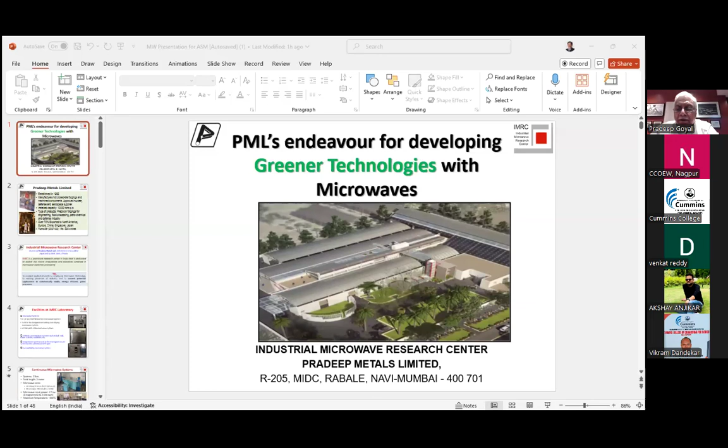Sir, just share your screen. Yeah, I'm trying to do that. What happens? There is a button, share. Is that... yes, okay. Perfect, perfect, okay. Just do, yes sir. Okay, is that good? Yes sir, perfect. All right.

Wonderful, all right. Ladies and gentlemen, thank you so much for inviting me to give this little talk on microwave research that we are doing at our company. Basically, our company has nothing to do with microwaves. We are in the business of making forgings and exporting them. But this came as a sort of offshoot of what I wanted to do based on some of the work that I had done in the past in research.

So I'll just go through some of the work that we have done in this company since 2006, that's when we started this microwave activity. This research has been going on for so many years. Several processes have been developed. It's a very challenging environment to work with microwaves. As you all probably understand, each one of you knows what a microwave is for sure. I think there is no home which does not have a microwave cooking arrangement in their kitchen. But we always fear that we cannot put metal into the microwave oven.

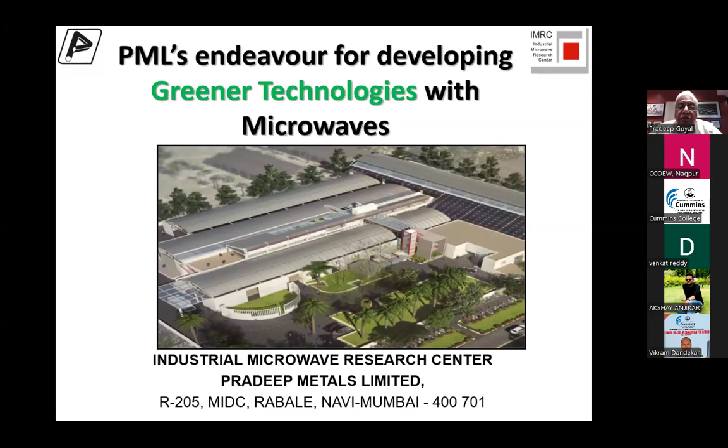So with that brief background on microwave heating, I will proceed to what we have. This is just a picture of our factory in Navi Mumbai, which is mainly focused on manufacturing steel, alloy steel, stainless steel, and other forgings, which we typically export.

We started this company, as the introducer already mentioned, in 1982, when I returned from the US, and we have grown since then. Most of our products are exported to North America, Europe, Japan, China, and other countries.

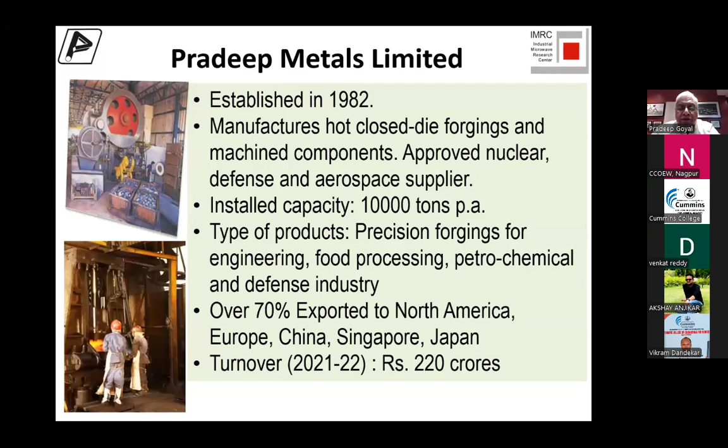This is a slightly dated figure: our turnover in 22-23-24 was 260 crores, showing little growth—of course, this covers the COVID period, which affected that number.

So we created what is called the Industrial Microwave Research Center in the year 2005. This is a DSIR, Government of India approved lab, and we conduct research here to exploit innovations in microwave materials processing.

Our goal is to look at processes that can lend themselves to using microwaves rather than regular conventional furnaces for heating or other processes, and to convert these potential applications into commercially viable, energy efficient solutions. As you'll realize, if you're heating something in a regular furnace that's gas heated or similar, you are actually using fuel.

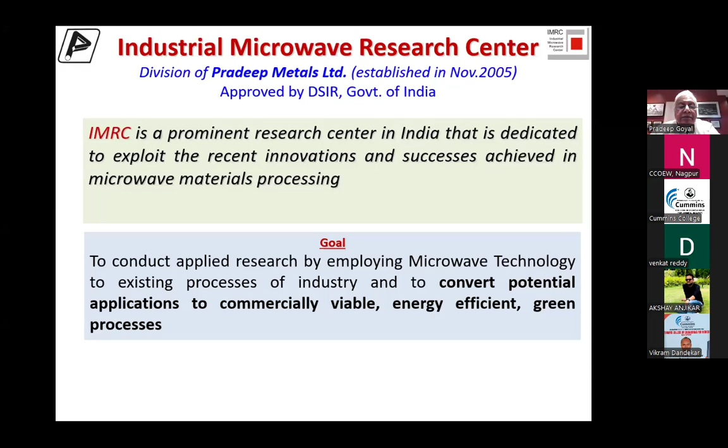In this case, it's called green because we are using electricity, and soon a lot of electricity is going to be green because of solar, wind, and other technologies. So microwave processing is termed a green process, basically. We have a variety of different sizes of furnaces available in our factory and in the research lab.

The first one that you see here is the one that we brought. It's a 5 kilowatt low temperature baking furnace. We have a pilot scale microwave system. We have mineral comminution systems, ball mills, mixers, magnetizers, and susceptibility measuring system.

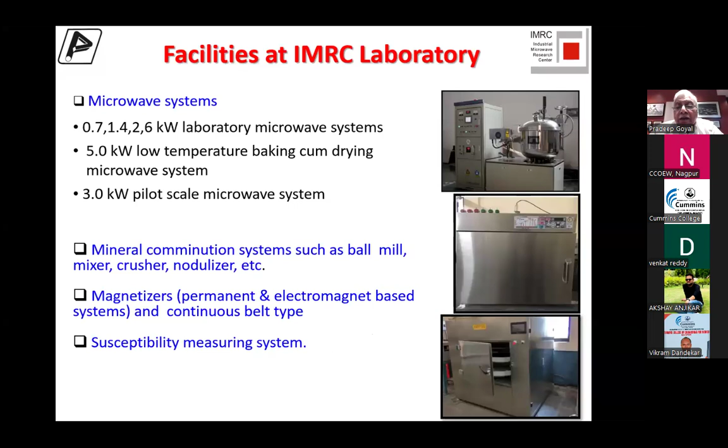Now, susceptibility is what I talked about, the way any material behaves under the microwave environment, how susceptible it is to absorbing microwaves. That is the intention behind this.

Then we have continuous microwave furnaces. You saw some pictures of stationary batch furnaces. Now you see some continuous furnaces. The one at the bottom is the latest one that we have installed, and I will come to the details of that a little later.

You can put a lot of different microwave powers in it. Just to put into perspective, the kitchen microwave oven is 0.7 kilowatt, generally in that kind of range. Most of these that we have are 3 kilowatt and above, so it's an order of magnitude higher in terms of the microwave energy that we can provide.

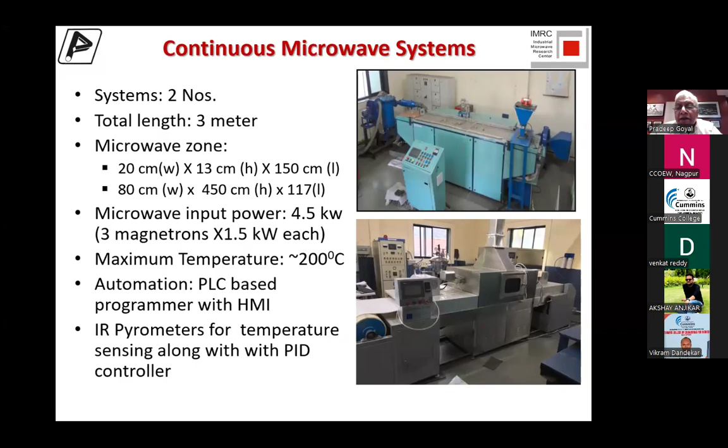All of these are PLC based. We have pyrometers to measure temperatures of the product which is inside the furnace.

So over the years, we have applied for several patents and several have been granted to us. We worked in a variety of fields: petroleum, iron ore, processing of grinding wheels, making friction pads for automotive and even aircraft, processing of ores of different kinds. And of course, the biggest one was iron making technology, how to make iron using a microwave composite heating furnace. This technology we developed along with Chubu University in Japan.

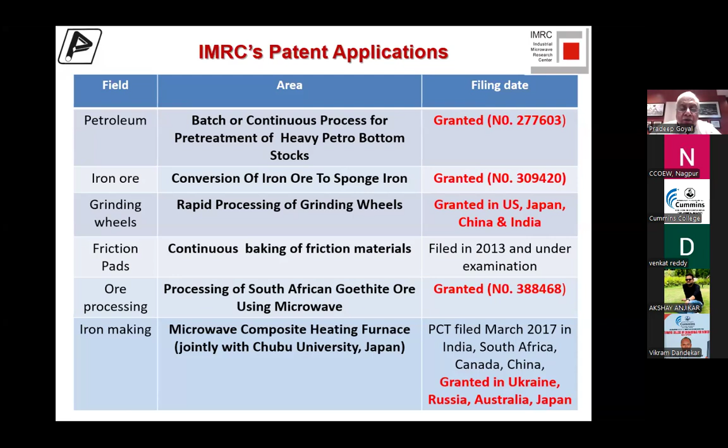Initial trials were conducted with a lot of different high temperature works. We did sintering of ceramic plates for solid oxide fuel cell electrode materials, metallic and ceramic composites, sintering of powder metal base components made of stainless steel, and transparent ceramics. All of these are things we experimented with extensively.

But we realized sooner or later that many of these may not convert into commercially viable processes. It was a great learning experience for us, but we did try processing a lot of different kinds of products in these furnaces.

Sintering of porous ceramic filters is an extremely viable process. A lot of Japanese and Chinese mills are using this for casting, so it's a standard process now.

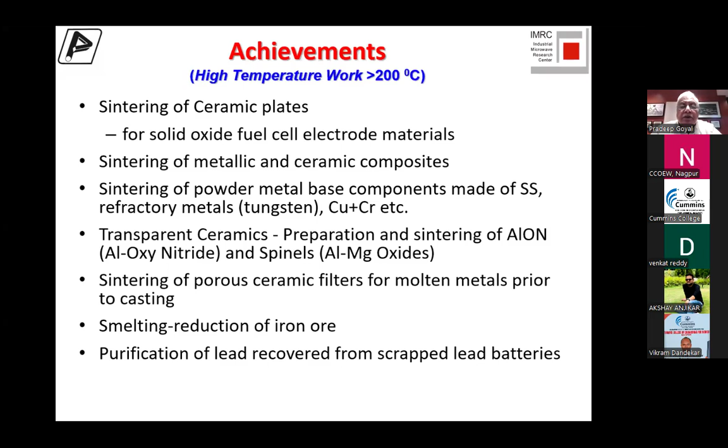Smelting reduction of iron ore is what I'm going to show you a little more. Purification of lead recovered from scrap lead batteries we did for a company that has developed a low temperature lead recovery process by electrolysis. So some of these works we did for many different companies.

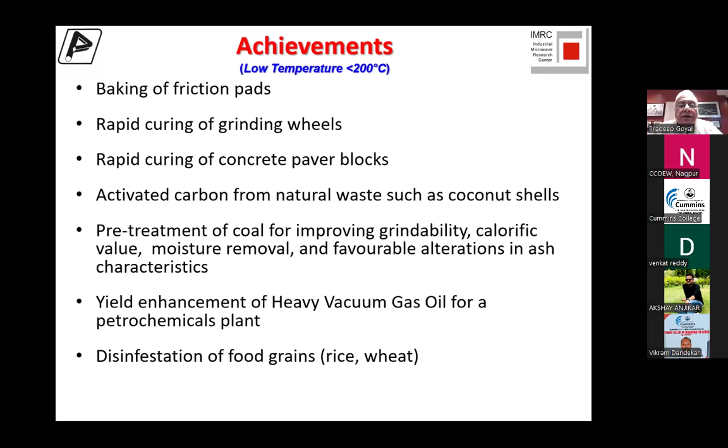And it's a very interesting thing. I will come to that also as we go later. So it's just a summary of what we had done.

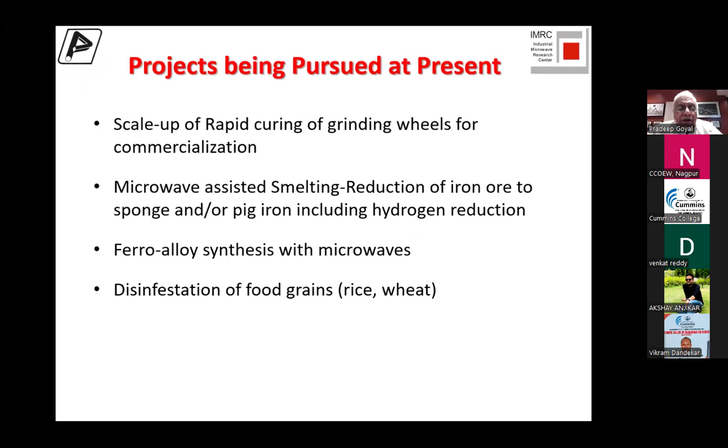Presently, the processes we are focusing on are scaling up the rapid curing of grinding wheels, microwave assisted smelting reduction of iron ore in hydrogen condition now. We tried pure electric activity, and now we are trying to look into the use of hydrogen. That's the future where the world is headed. Also ferroalloy synthesis with microwaves, and finally disinfestation of food grains, rice and wheat, which is becoming quite critical now.

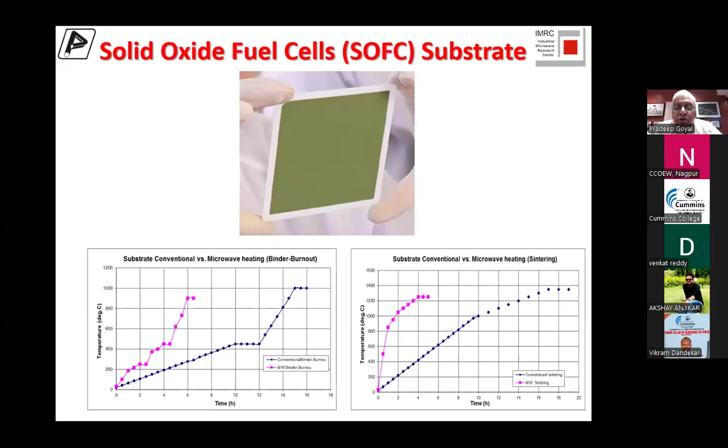One challenging assignment came to us from DMRL in Hyderabad, who had tungsten powder and wanted to actually melt it in some places. They also gave us the powder to look at how we can make the microstructure better.

Here you can clearly see the SEM images at 1000x of the as-received tungsten compared to the sintered-in-microwave tungsten at 1800 degrees Celsius with 1 hour soaking. So not only did we go up to 1400 in steel, but for tungsten we went up to 1800 degrees Celsius in a microwave environment. There's a lot of porosity compared to the milled tungsten, which showed a very good microstructure at 1000x.

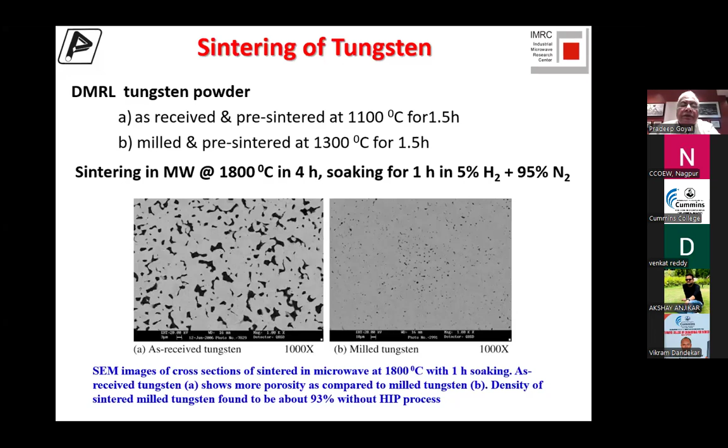I'm not going to spend more time on this. This is just to give you an idea of the variety of things that were done for our learning process.

This was really a big project we took up to see that we can rapidly cure grinding wheels. Grinding wheels are used all over in every industry you can think of, for cutting steel and all kinds of things.

Now here you see this graph. The conventional process is the blue line. The grinding wheel is so thin, like 2 or 3 millimeters, and if you try to heat it very fast, it will crack. The green grinding wheel will crack.

That's why if you see the stepwise process going from 80 degrees to 120 to 150 to 180, slowly heating the grinding wheel and keeping it at temperature, after about 1600 minutes you have baked the grinding wheel. But when we did it in a microwave environment, look at the black graph: we went up rapidly from room temperature to about 230 degrees and cooled it, and nothing happened. It didn't crack. Nothing happened to the product.

Now if you look at the energy as an area under the curve, look at the amount of energy used here compared to the energy used under the blue graph—it's huge. So when someone once said you can save 95% energy by processing materials in a microwave environment, I couldn't believe it. But after doing this research, I could clearly see that a huge amount of energy is being wasted presently, and that can be saved significantly.

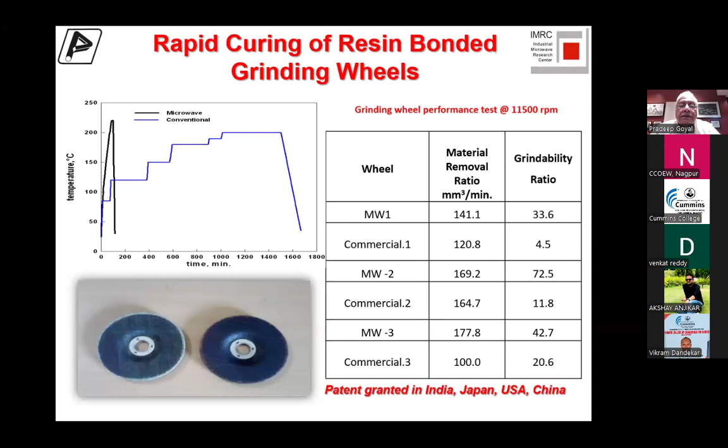Here you can see some performance parameters for commercial wheels versus the microwave-processed wheels. You have much higher properties, much higher grindability ratios. We could actually use this grinding wheel to cut twice the amount of steel compared to commercially available grinding wheels. This was a huge success, and we are now working towards full-scale commercialization of this process.

So it's very simple, affordable, and economical. The grinding wheel is rapidly and selectively heated by microwaves, leading to a huge reduction in processing time. The process is highly energy efficient, as I said, and it provides better properties of the product, such as metal removal rate and grindability ratio.

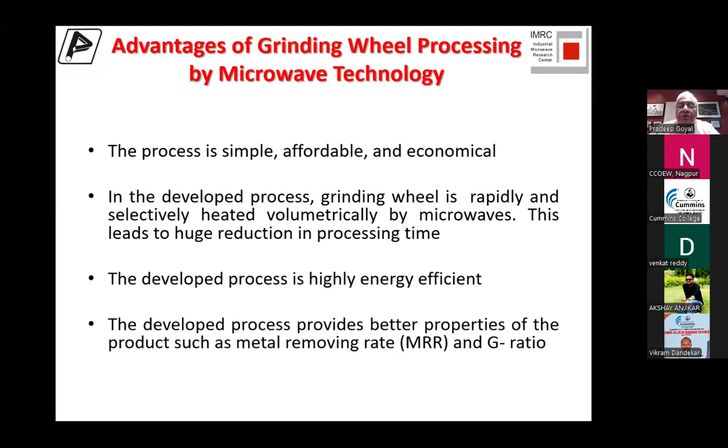Then we looked at, for an oil processing company, a process for pre-treatment of heavy petroleum bottom stocks. When we make petroleum in the refineries, you get what is called HVGO, which is then processed in hydrocracking for fractional distillation. We developed a process where we passed the oil through a magnetic condition and processed it in microwave. Because of that treatment and exposure, we were able to draw out more kerosene and more fuel compared to what they were actually achieving. At the same time, we were able to reduce sulfur, which is very important for kerosene and diesel—the sulfur in diesel went down from almost 18 to 9, half.

Which was very exciting for these companies. But of course, as oil companies are giants, and we are kind of a pygmy, they probably took it upon themselves to carry on further research. They probably used us to get this data and get this idea, but then scaling up an oil company's process is a huge challenge for a small company like us.

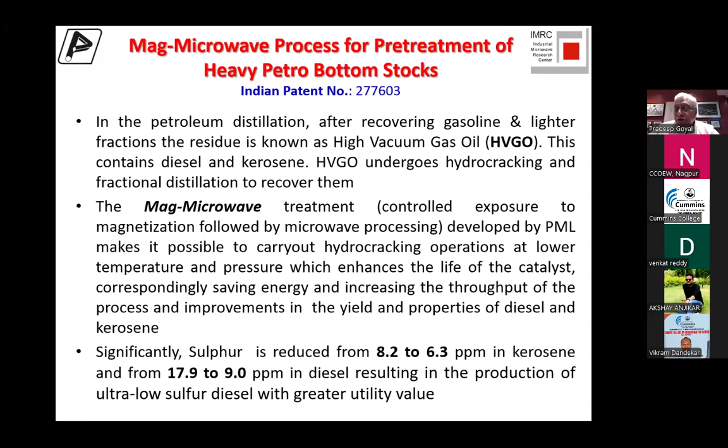So we are happy that they were able to look into this process a little more. We found that you could get at least 1 or 2% more fuel, which is huge in a refinery. To get 1 or 2% excess fuel out of the petroleum base is extremely high, very interesting for them.

Then we took another process, which is the pre-treatment of coal. Coal comes in a variety of different types. Some are very hard coals, difficult to process, with trapped water in it. That eats away the energy, since the water has to be heated.

And water is what we want in a microwave process, right? So water is what really works. When we processed the coal in the microwave, we were able to take away all the water from the coal. But an interesting thing happened: because of the disproportionate heating of coal and water, the whole coal cracked, and you can see how the cracks appeared. This hard coal, which was very difficult to grind, became very pliable for grinding also.

So we achieved two successes here: one, removal of water, and two, making it more easily grindable. The third benefit was that the ash fusion temperature increased from 1160 to 1310, which is extremely crucial for a power plant.

When you heat coal in a power plant, the ash that comes out chokes up your tubes. But if the ash fusion temperature increases, the ash won't stay in the tubes, it will pass through, so the tubes last longer. That was another big advantage that came, which we were not really expecting. It was an unusual thing that we realized.

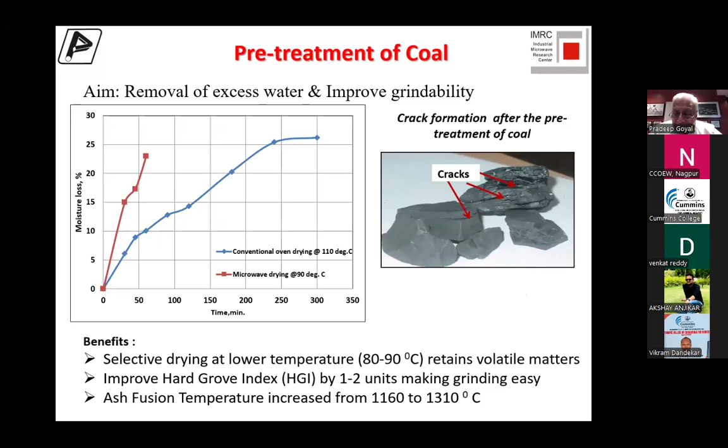Many times what we find is we process these things, but we don't understand the underlying technology, what is happening there. So in many ways we call microwave processing like magic. Many of these things are still not scientific processes - they've been developed, but the science behind them still has a long way to go to understand some of these things.

Now let me come to the main portion I was asked to speak on: microwave assisted iron making. We started with very small green pellets to melt in the microwave oven. We took these green pellets of high-grade iron ore mixed with coal. Mind you, all steel mills use coke for melting and reducing iron ore.

But we never used coke, we always used coal, because coke is very difficult and very expensive. We used some binder, and were able to melt the pellet comfortably to get iron and slag. This is the configuration and analysis of the iron we produced in a small scale furnace initially, with low sulfur, low phosphorus, decent manganese, and 97.78% iron, which is quite good, and we recovered the carbon.

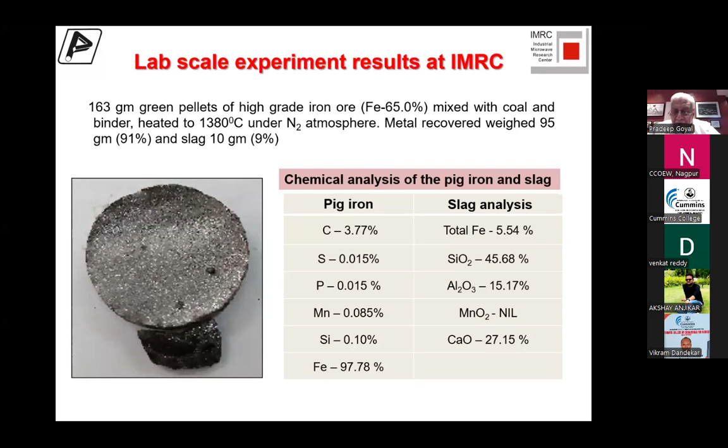So we were able to make very good quality pig iron. Then we took a higher size - a 700-gram green pellet. Now we took the low-grade Goa iron ore. Here the iron content in the ore is only 46%, so a lot of it is sand and other materials. We did the same process.

Here we were able to melt the iron at 1300 degrees Celsius, which is very low compared to how iron is normally made. If you see the bottom with the pig iron, there's a very small amount of pig iron there, but a very large amount of slag. This slag is because there was a very low quantity of iron available in the raw material we processed.

And it separated very nicely - you can clearly break off the slag and remove the metal out of it, right? So here again we recovered all the carbon.

Phosphorus was a little higher because the content in the Goa iron ore was significantly higher, and of course we were able to recover a lot. Here you see a lot of silica, SiO2 is about 37%. This was very interesting—this was again a find which was unknown.

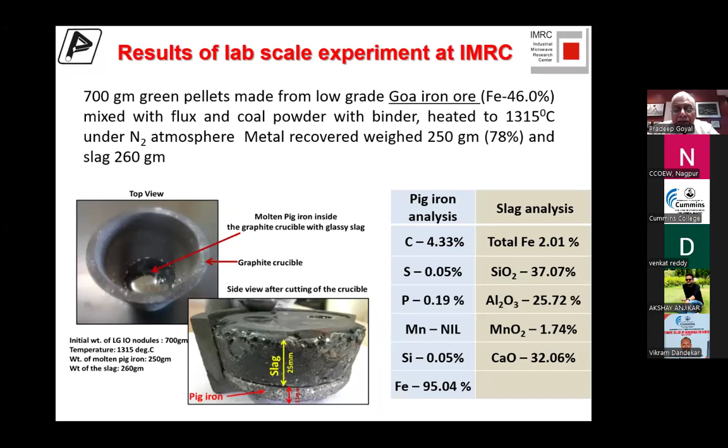This was a green glass, so we didn't know what this looked like. So we sent it to a government lab called CGCRI, Central Glass and Ceramic Research Institute, and they were very surprised. They said, 'How did you make this?' I said, 'We didn't make it, it happened by chance.' So when we were processing this low grade Goa iron ore, we by accident developed this green glass, which they said is very interesting, and maybe the army might be able to use this glass for certain applications.

Again, clean energy source, reduced CO2 and SO2, because we are using here only the stoichiometric amount of carbon in the form of coal. Normally people use double the amount of carbon because some of it goes to heating the material and some of it goes for reduction. Here we don't need anything for heating, carbon is only required for reduction. So theoretically, we can do away with 50% carbon compared to the regular iron making processes.

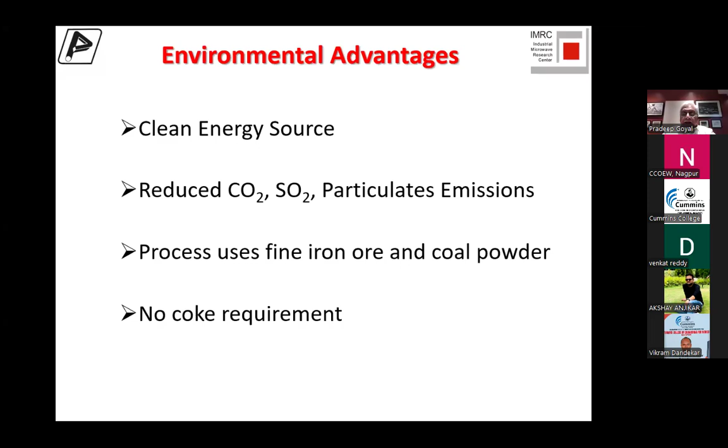And we can use fine iron ore and coal powder, which is the cheapest available. None of the other iron making processes can use fines of iron ore and coal, which we can use very conveniently by making pellets out of them. And we don't need coke.

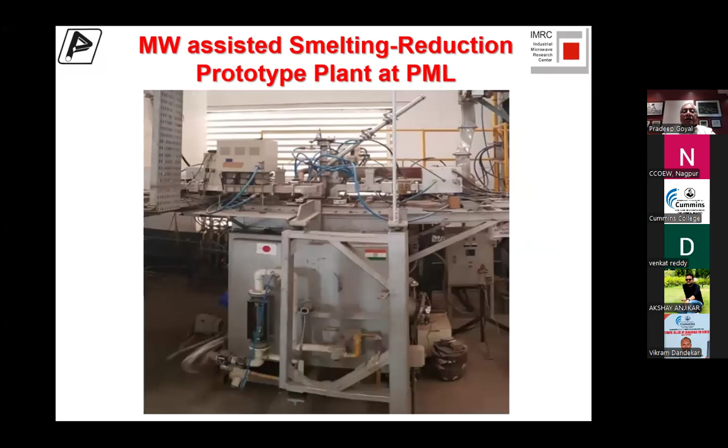So this is our furnace that we built along with the Japanese for smelting reduction of iron ore at our plant. This is installed at our factory here. So here I'll show you the progress, how the smelting reduction reaction takes place.

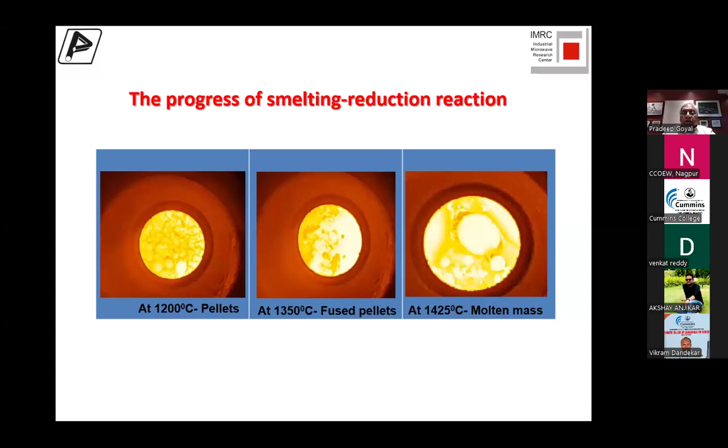So we put pellets into this crucible. At 1200 degrees, you'll see some pellets. At 1350, you'll start seeing some fused pellets. And at 1425, you'll see a full molten mass. It was very interesting for us to go through this whole thing, which you can also see, how this process really occurred.

In the background, you can hear our hammer making forgings.

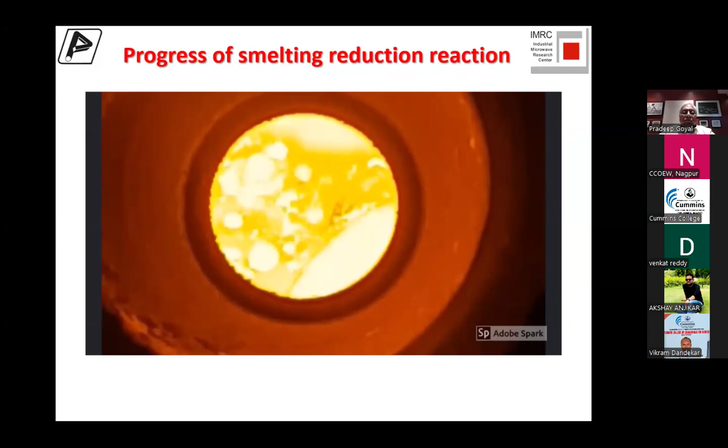So that was just the melting part of it that you saw. But then we took a chance to see how we can pour this liquid metal. Just melting, of course, you can do that, but now we wanted to really simulate how we would do it in a live environment, where you keep on melting and you keep on pouring this metal.

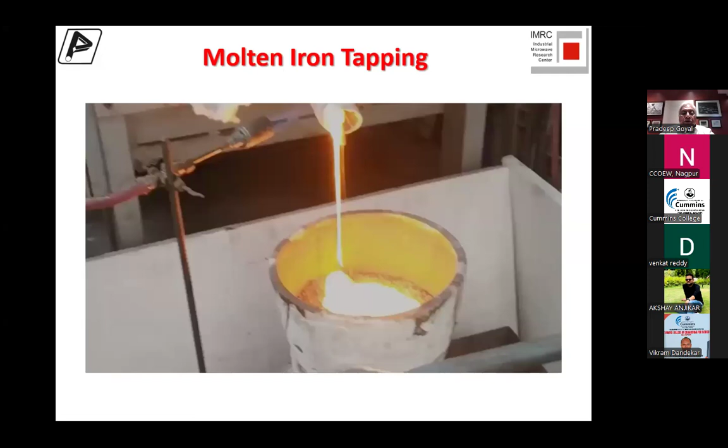So we created this whole infrastructure so that we could tap the molten iron into a crucible outside the furnace. This is something we experimented with for the first time, and we were so fortunate that it happened. It was really the aha moment for our team working on this process, that we were able to tap liquid iron from a microwave furnace.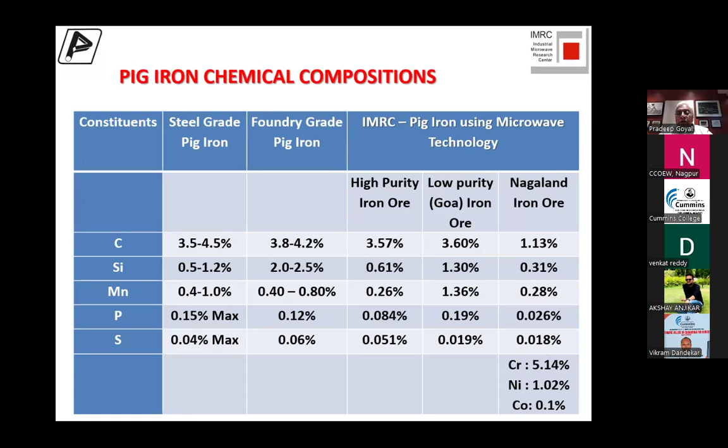This became of big interest to the steel ministry because there are millions of tons of this ore lying in the Nagaland area, which is magnetite in nature, and no steel mill is willing to use them. So these are some of the results that we see, which were out of our knowledge that we would be able to achieve these kinds of results.

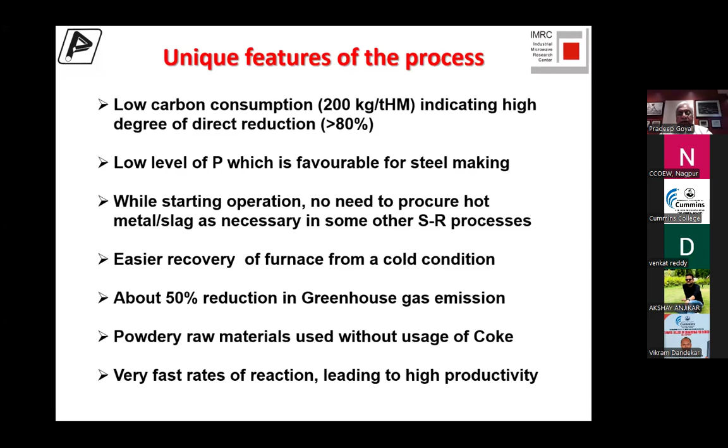Low carbon consumption, 200 kg per ton of hot metal. It's a direct reduction process with low level of phosphorus, which is favorable. No need to procure hot metal slag as necessary in some other processes. Easier recovery of furnace from a cold condition. 50% reduction in greenhouse gas. Powdery raw materials used without usage of coke, and very fast rates of reaction leading to high productivity.

Now, if you look at the conventional process of making iron, on the left in the yellow portion you have a blast furnace. If you look at the chemistry on top, you have 6 molecules of CO2 produced in the process. While if you look at the microwave processing, using microwave energy we produce only 3 molecules of CO2. So this is what I was talking about, a 50% reduction in CO2 production.

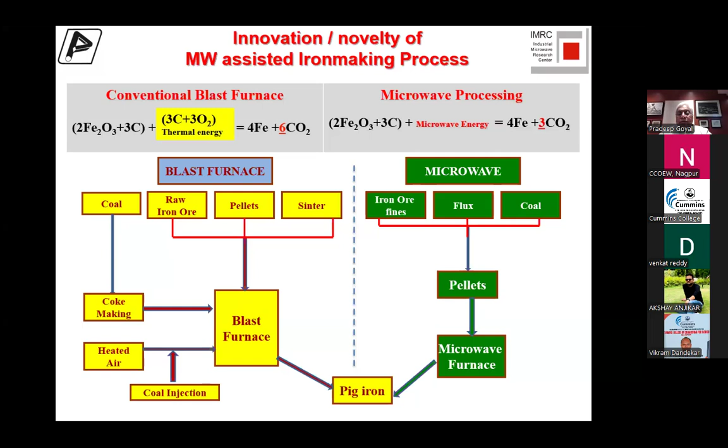And look at the clean process that we have. We have iron ore fines, flux, coal fines, we make pellets, and we directly reduce it in a microwave furnace to produce pig iron. While in the other process, you have to take the coal, make it into coke, have coal injection into the blast furnace, have raw iron ore, pellets, sinters, put it in the blast furnace, and then make pig iron. So there's a huge reduction in the number of steps in making pig iron by this process.

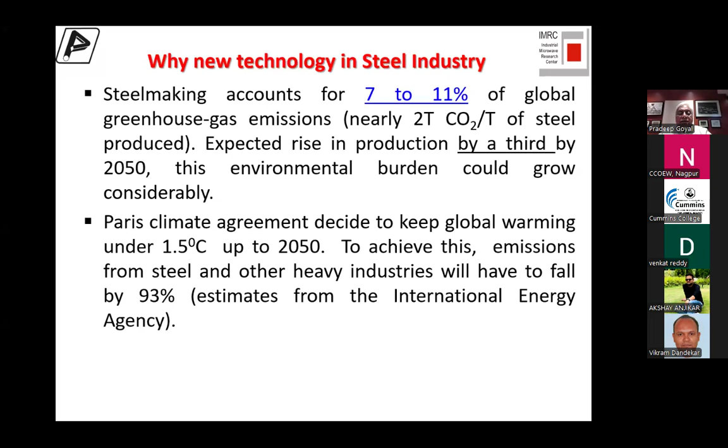Why is new technology required? Steel accounts for 7 to 11% of greenhouse gas emissions worldwide. Everybody is looking at ways the CO2 reduction can happen. This is the largest commodity produced in the world, a few billion tons. So any process improvement here would make a huge impact on CO2. If we are taking up the challenge to reduce global warming, the steel industry would have to play a large role in that.

There are many companies worldwide spending millions of dollars on developing hydrogen green steel and others. Of course, we don't have that kind of money - I wish we had, I'm sure we could have scaled up our process significantly. But these companies are doing a lot of different developments in hydrogen and other steels.

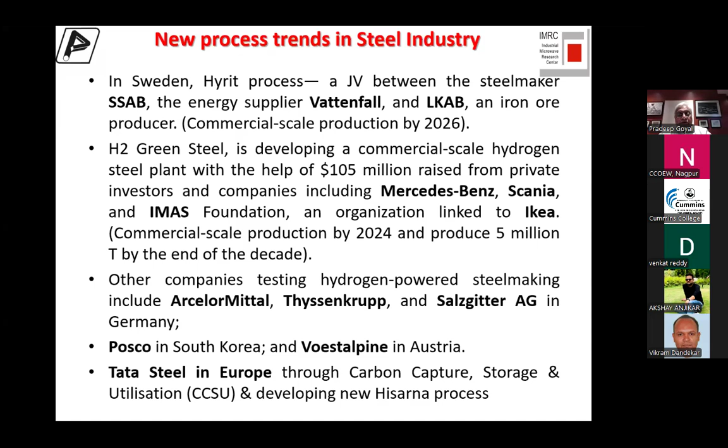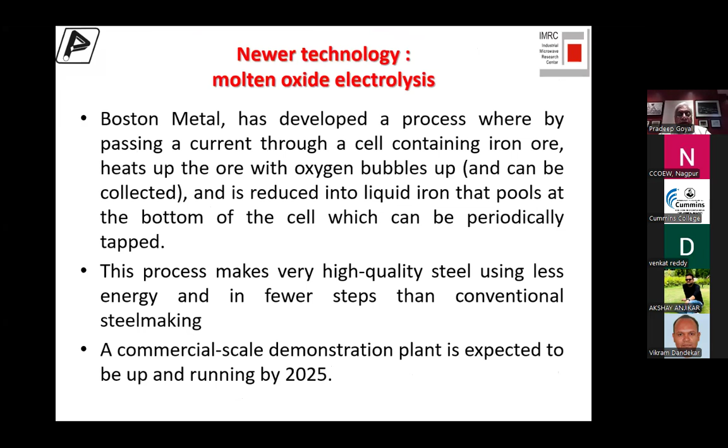Boston Metal has developed a completely different process where they reduce liquid iron into pools at the bottom of a cell, mostly like an electrolytic process - high quality steel using less energy and fewer steps. A commercial scale demonstration is expected shortly. So many companies, we are keeping track of what's happening there. Now we come from 1800, 1400, 1500 degrees Celsius down to 60 degrees Celsius.

Why this interest in disinfestation of food grains? I'll come to that shortly. Now in India or worldwide, there are a lot of losses of grain because of insects, and the nutrition value also drops in that case. So these insects are killed by toxic chemicals like methyl bromide, etc., which are technically banned by the World Health Organization.

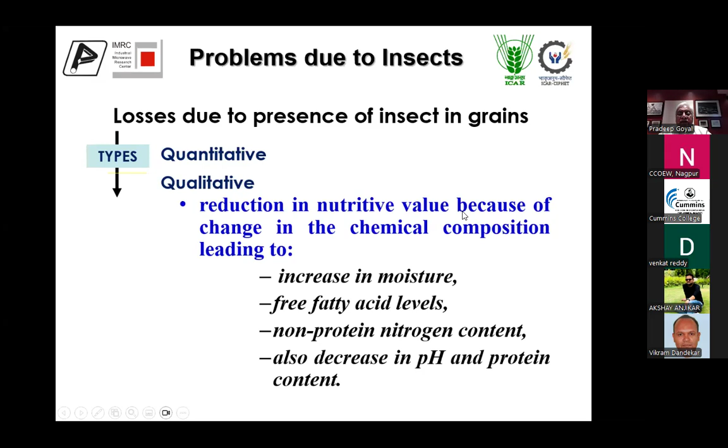But due to lack of any other available process, that continues to happen with methyl bromide. So we decided that grain also has water in it, and so does the insect - insect is ultimately bulk water. So we decided, let's try this process to kill the insects by microwave processing.

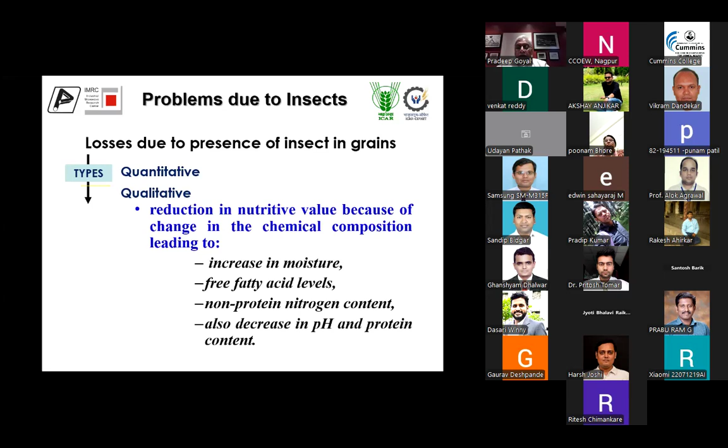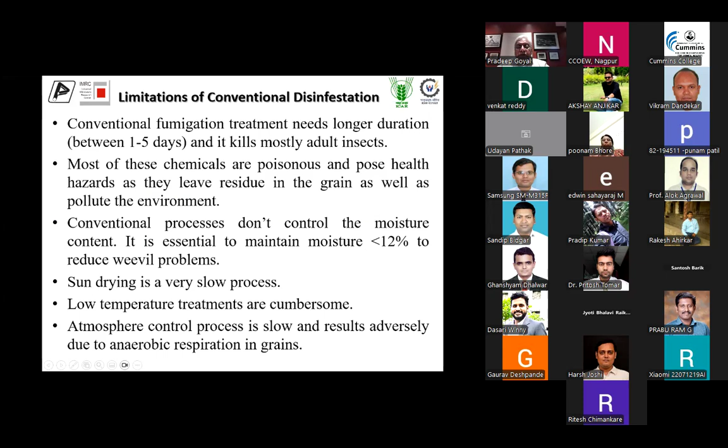Conventional fumigation needs longer duration and kills only the adult insects - that's very, very crucial here. Most of these chemicals are poisonous and pose health hazards. Conventional processes don't control the moisture content, and it's essential to maintain moisture to reduce weevil problems. Weevil is the insect. Sun drying is a very slow process. Low temperature treatments are cumbersome. Atmosphere process control is slow and results adversely due to anaerobic respiration in grain.

Now, microwave kills all stages of the insect - egg, larva, pupa, and the live insect. Methyl bromide kills only the live insect; the early three stages are not touched. So after 15 days, the pupa comes in and becomes a live insect - it's a never-ending process. The microwave, however, kills all the stages.

So once you have microwave processed the rice, all stages are gone, and if you close it at that time and don't allow cross contamination from the air, then the rice is permanently rid of all the insects. You need a very short time exposure for elimination of these insects.

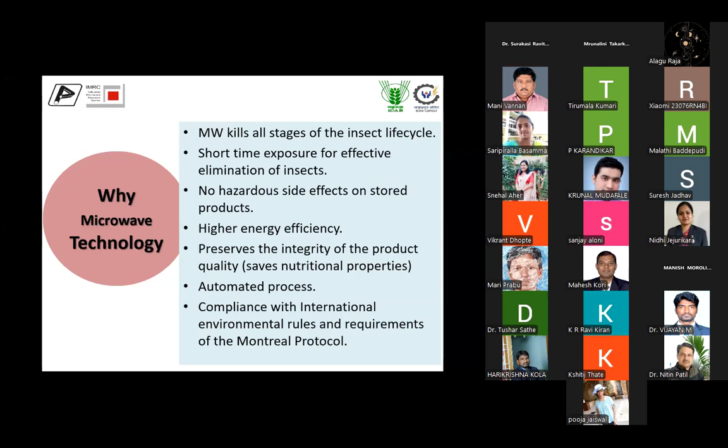No hazardous side effects on the stored products, very high energy efficiency. It preserves the integrity of the product. By the way, all of these things have been tested by the government lab from Ludhiana, which is the Post-Harvest Institute of the Government of India. It complies with international environment rules.

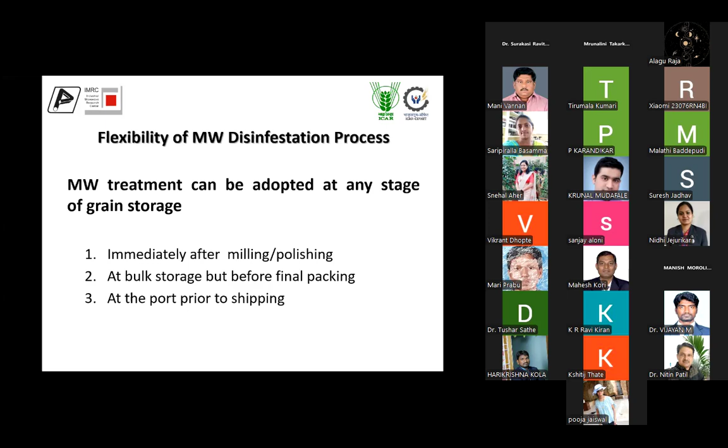So this can be adopted at any stage. It can be immediately after milling, polishing, at bulk storage, but before final packing, or at the port prior to shipping. Depends where you want to do it.

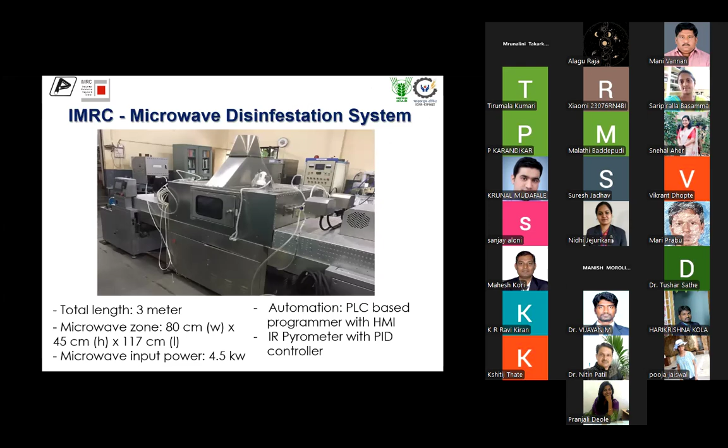So this is the process. You have a mixer, you add some moisture to the rice, you have a feeder, and then you have a microwave exposure in this portion, and then an aspirator for insects. At the end of it, all the dead insects will get pulled in, sucked out through this thing, and we get only the clean rice at the bottom. So all this rogue collection happens here in this vessel.

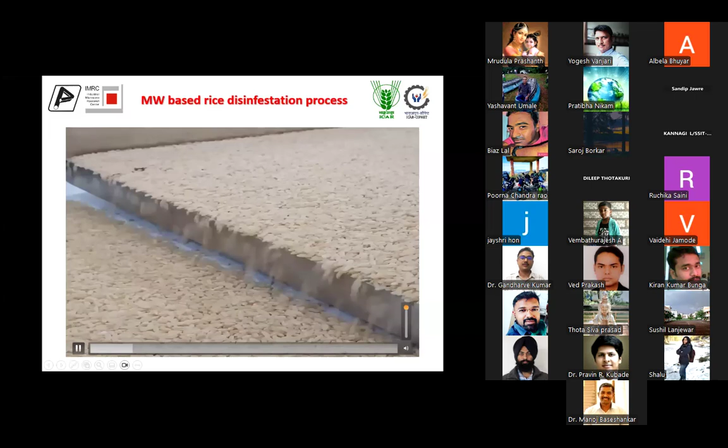This is the microwave portion where it's being treated with the microwave.

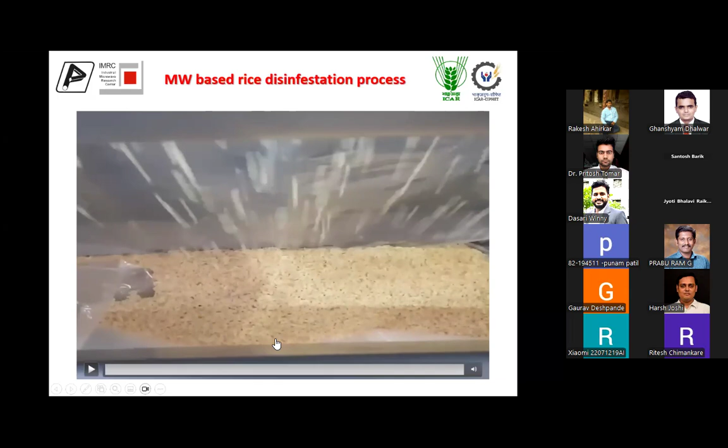So that rice is now completely devoid of any insect. And if you pack it right away, there is no chance of any insects coming in.

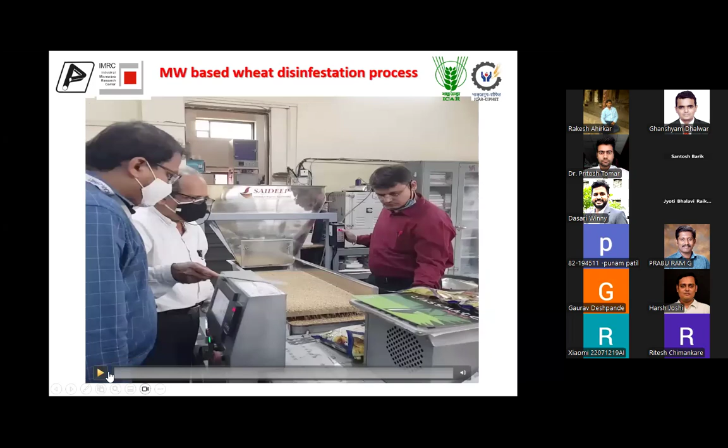So these are the people from the Post-Harvest Institute and our scientists trying to measure the properties, temperature, and other parameters. Of course, this is wheat here. Any grain can be processed in this environment.

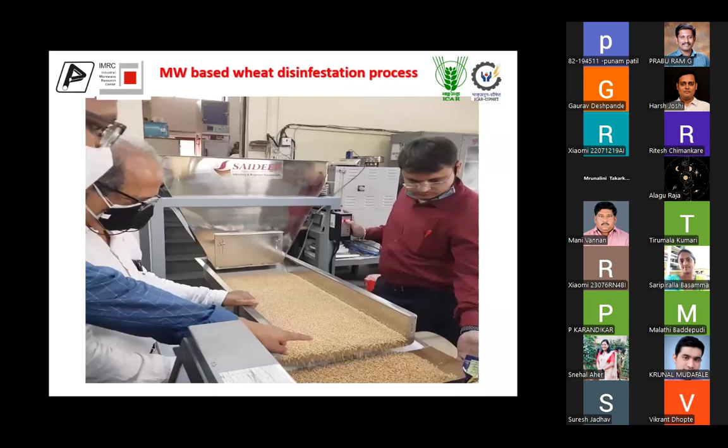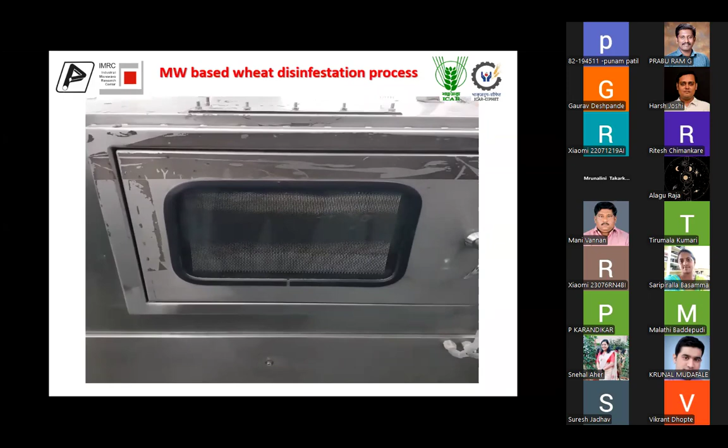It took us about a year and a half to completely convince the institute that our process is robust and it can do the job. So they did all kinds of tests, not only at our lab, but also by taking it to their labs to do nutritional studies and all other things that they wanted to study before they gave us a clean chit that we can use this process.

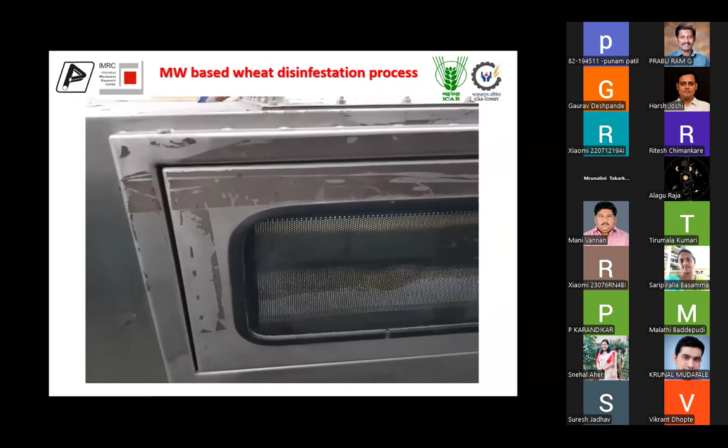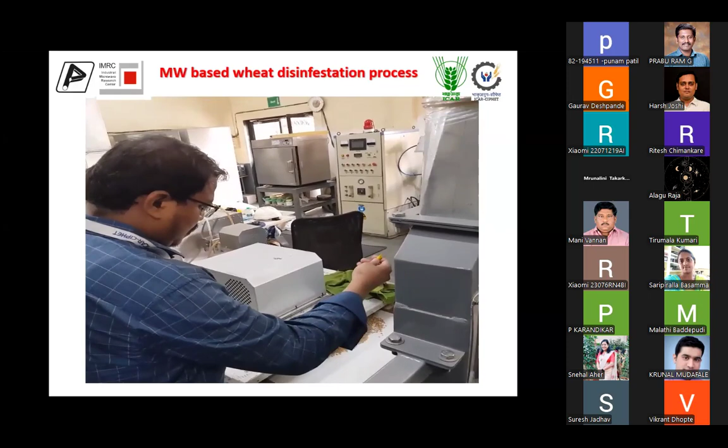Now the challenge is to scale it up, because what we have is about 150 kg per hour of processing, but the demand is to make 10 tons per hour. So it's a huge change that is required, many orders of magnitude higher. But we are in the process of discussing with manufacturers of equipment as to how we can do that.

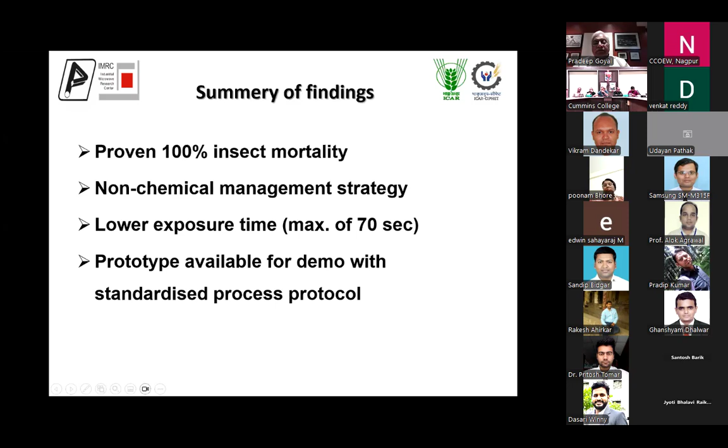So this is our finding from this whole institute, from this study along with ICAR. It's 100% insect mortality observed in this non-chemical management strategy, with lower exposure time, maximum of 70 seconds, and a prototype available for demo with standardized process protocol.

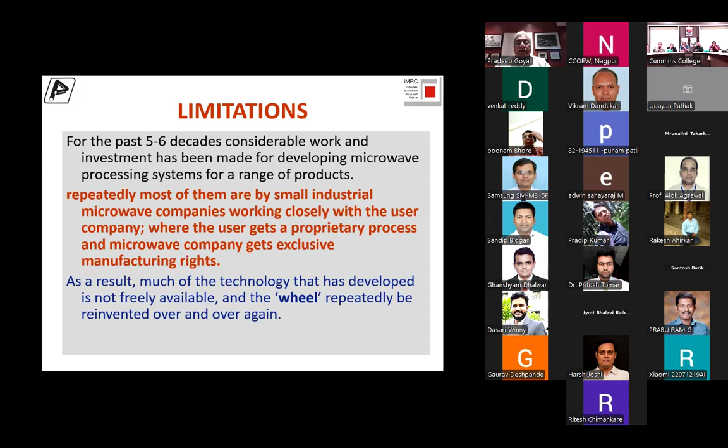So for many decades now, a lot of work has been done in terms of microwave processing of different products, and most of them are by small industrial microwave companies along with users. Much of the technology that has developed is not freely available, and the wheel is repeatedly reinvented over and over again. That's why people don't share knowledge, and that's why the industry hasn't picked up in a very large way. Except now in many countries, all the chips are made by this. The meat is processed in microwaves, and many of those have become standard processes. But not much into the high temperature realm.

So what are the barriers here? The price of the equipment, the risk of failure. Some of the benefits are not understood. The science behind it is not understood. The lack of technology of using microwaves. People are afraid that if my hand goes into the microwave oven, it will get burnt. Of course it will, because that's moisture in there. So you have to be careful that there is no leakage of microwave from any of your furnaces. And the priorities don't seem to be in the radar of any bigger companies.

And every material has different microwave heating properties. Furnaces need special designs every time, and you need a long time experience in this field. The microwave generators and devices have to meet the high requirement of industrial production, and stabilized long life power is required.

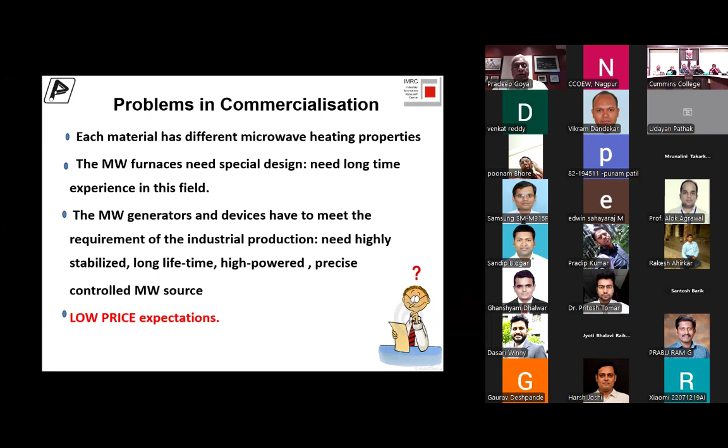People expect very low prices, that's the whole big thing. So now microwave is well accepted for cooking.

A lesson learned in industrial microwave heating is that the industry must understand the benefits and limitations of microwave. Simply exposing samples to microwave, you cannot achieve results. It's not as easy as it appears, but you have to be extremely careful about what you are doing.

You have to take measurements for effective process control. So all these types of challenges are there. Chemical properties of material need to be understood, applicator designs are to be developed, and process economics has to be proven.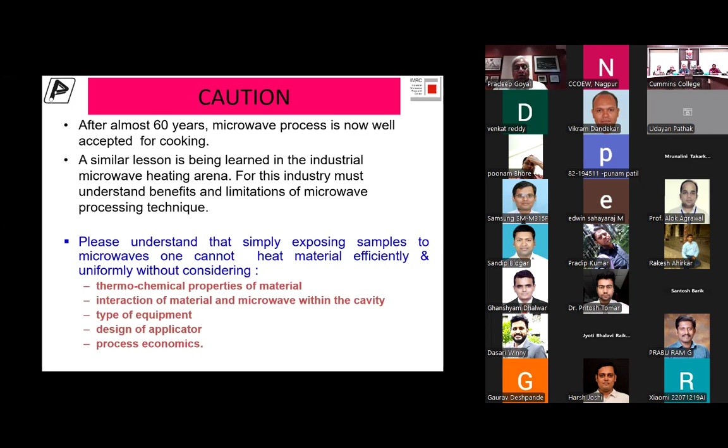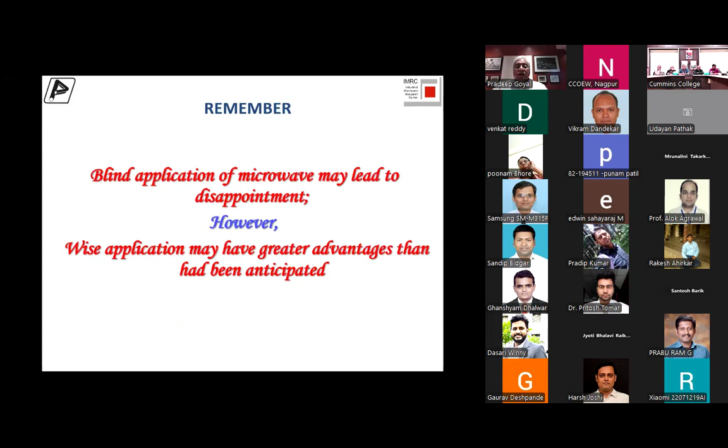So you can't just blindly apply microwaves, you can be disappointed seriously. But if you use it wisely, you can have really great advantages, particularly like I showed you about rice. Also the grinding wheel process, an extremely high energy efficient process that we developed.